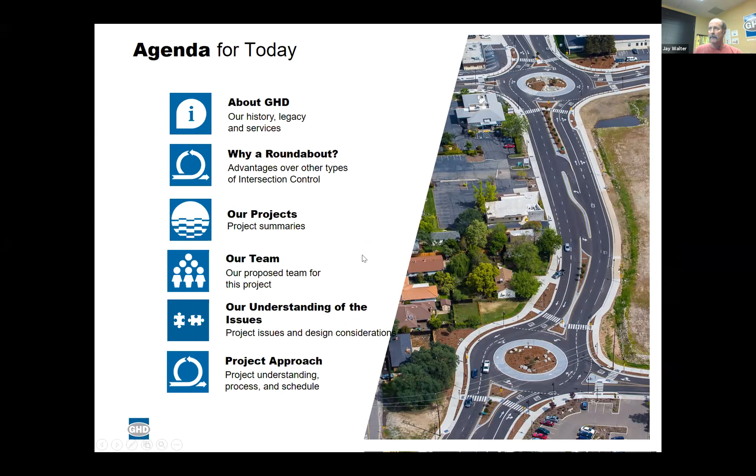GHD as a company is based on 5 continents. We have over 10,000 employees with 200 offices, so we have significant resources at our disposal and a lot of experience with roundabouts, especially in Australia and New Zealand, where they are quite common. We have folks from our Roseville office and San Luis Obispo office working on this project, so it's quite an important project for GHD.

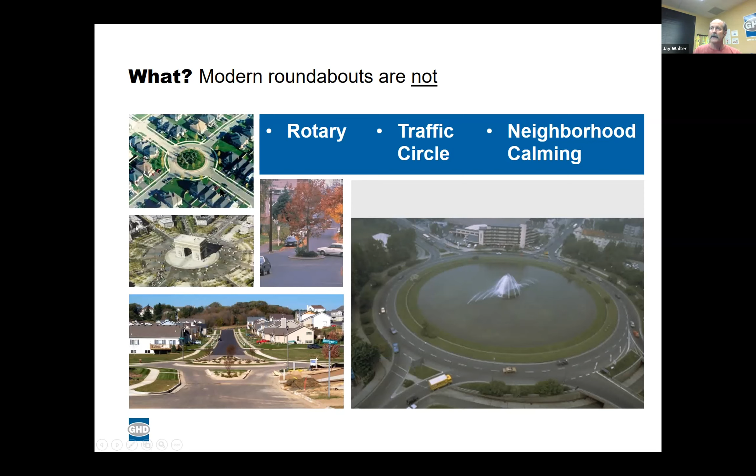Let's talk a little bit about roundabouts. Modern roundabouts are not a rotary, a traffic circle, or a neighborhood traffic circle. You can see some of those examples in the pictures on this slide. One of the main differences is that these circles have entry points that come in directly from the side streets, and that is not what we call a modern roundabout.

A modern roundabout is circular. It utilizes specific design criteria for the entry angles and for the size of the center island, and it's designed to control speed through an intersection. It also accommodates the multi-modes of transportation that we have, like pedestrians, bicycles, cars, and large trucks.

Typically it has a center island that can have some landscape or decoration. It's got a raised truck apron, which you can see in this light color around the middle, which allows some larger trucks to track through the roundabout and still stay on pavement. It has splitter islands at each entry point where traffic going in or coming out of the roundabout is separated. Very importantly, it has what's called a yield on entry as you approach and enter the roundabout.

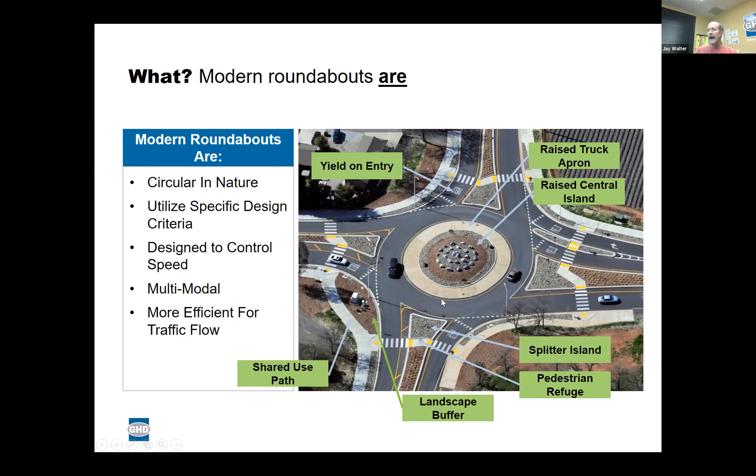So the idea is that you need to control your geometric speed on your approaches to the roundabout so that you can control and slow speeds through the roundabout and have traffic be able to enter and exit in a very safe manner.

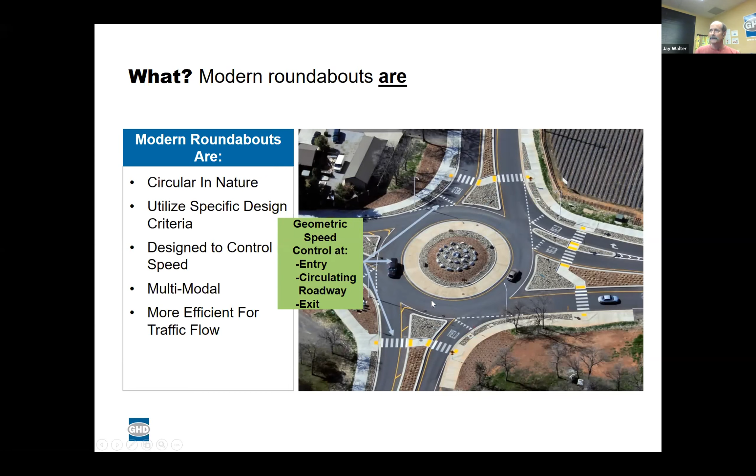One of the roundabouts that has been constructed is nearby. Many of you have probably driven or seen the Holman Highway 68 roundabout, constructed a couple of years ago. The feedback we've received from Monterey has been that it's performed in a very outstanding way. It also helped clear up some of the traffic confusion for the entrance to 17 Mile Drive. This is an example of a modern roundabout with the yield on entry.

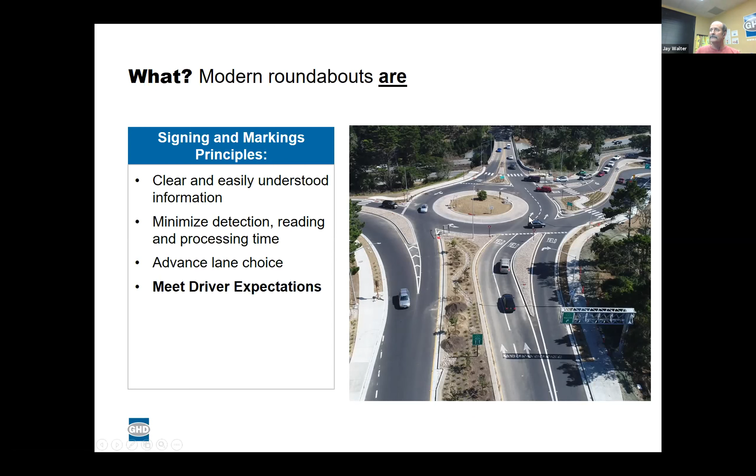It has clear markings for vehicles as they approach, so they can have a real good expectation of what they're going to do when they get there. They're warned ahead of time that a roundabout is coming, they see the lane markings where they need to be, and then they're told to yield at the entry point, and they pick a gap to go and enter the roundabout.

A modern roundabout also accommodates all users, from emergency vehicles, large trucks and trailers, pedestrians, cyclists, and especially pedestrians with disabilities who can't have curbs and other kinds of things blocking them as they're trying to cross an intersection.

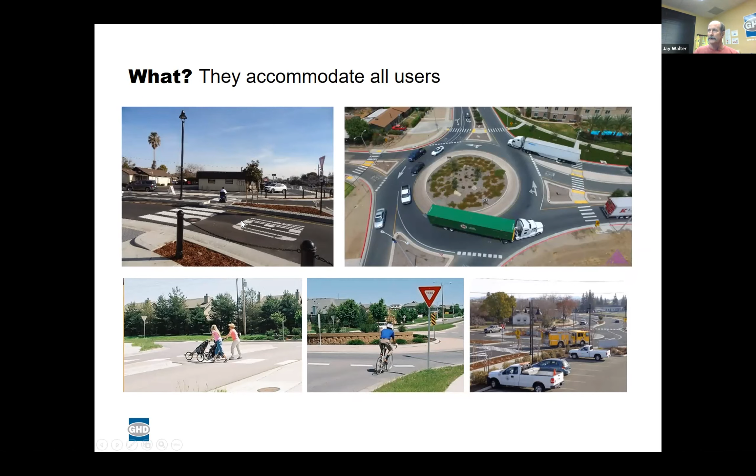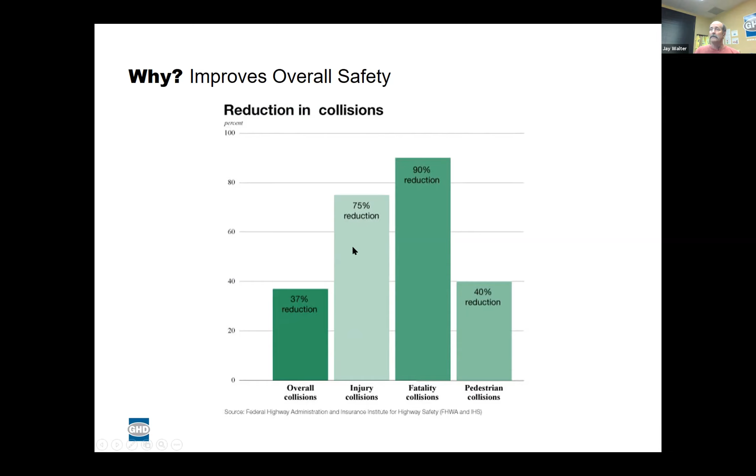Modern roundabouts improve overall safety at an intersection. As you can see from these numbers, overall collisions, injury collisions, fatality collisions, and pedestrian collisions have significant reductions with a roundabout compared to a signalized intersection.

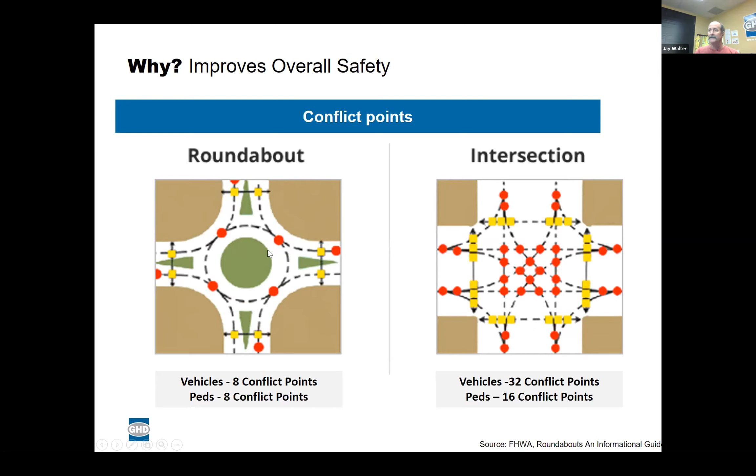So why does it improve safety? There's a couple of reasons, but one of the most important is that this intersection diagram shows vehicles entering and exiting have as many as 32 conflict points where they could collide with another vehicle. There's also 16 conflict points for pedestrians, increasing their exposure. But with a modern roundabout, conflict points for vehicles are reduced to only 8, and pedestrians also only 8. That's because you have fewer lanes entering and virtually no one crossing anyone else to make left turns, U-turns, or go straight through.

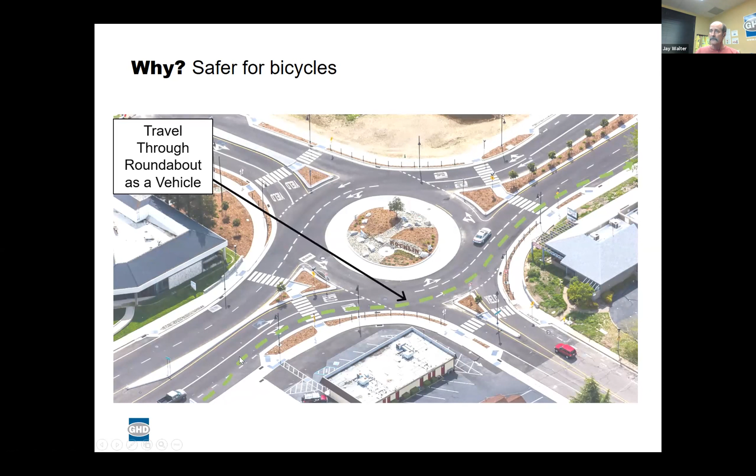Modern roundabouts also provide a safer way for bicyclists to get through an intersection. A bicyclist can travel through in a couple ways. The green dashed line shows when a bicycle wants to travel through like a vehicle - speeds are slower, and generally it's safer for a bicyclist to do that. But for a bicyclist that's not as confident, they can get off and use the shared use path for pedestrians to cross the roundabout and then go about their way on the far side, creating a slower speed in the intersection for cyclists as they cross.

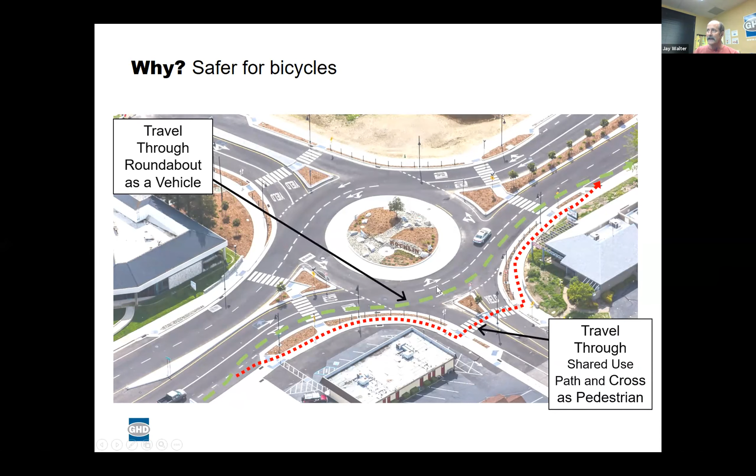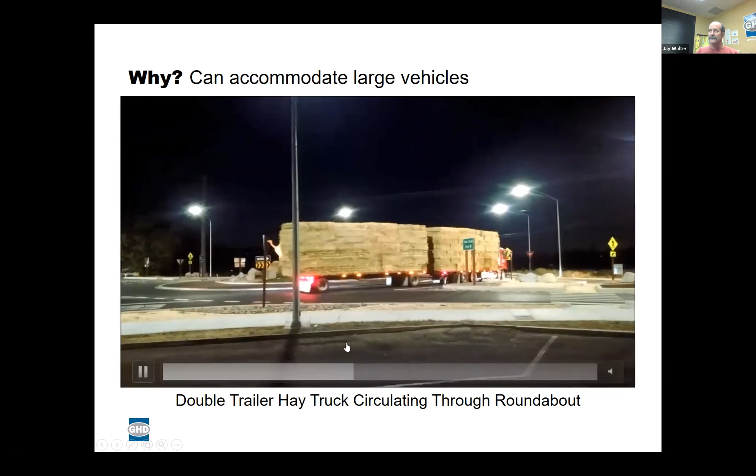A modern roundabout can accommodate large vehicles. You can see this double trailer hay truck coming through the roundabout, with intent to make a left turn across the intersection. He's circulating slowly but surely, with other vehicles following slowly behind, one waiting at the entry point to find the gap to get in. Then the hay truck moves off onto the far side of the roundabout where he has completed his left turn without having to wait for all the other traffic to stop crossing for him to go through.

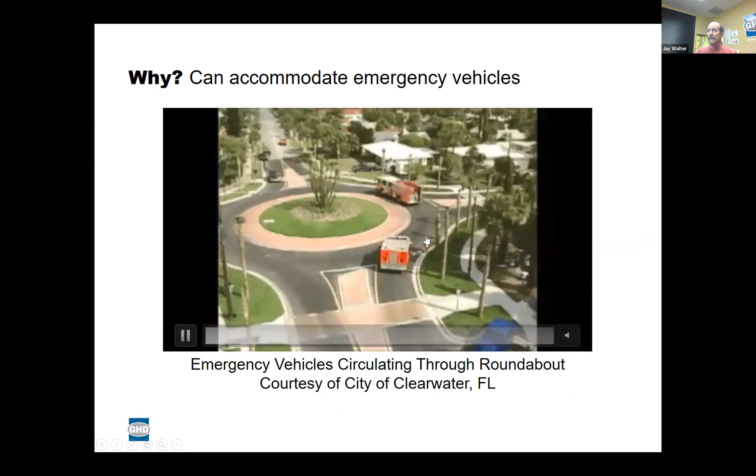For emergency vehicles, the roundabout is designed so those vehicles can circulate through at a relatively safe speed. They can't go screaming through at 40 miles an hour, but they can go through at 15 to 20 miles per hour, which provides safety as well as the ability to see more clearly vehicles that might already be in the intersection.

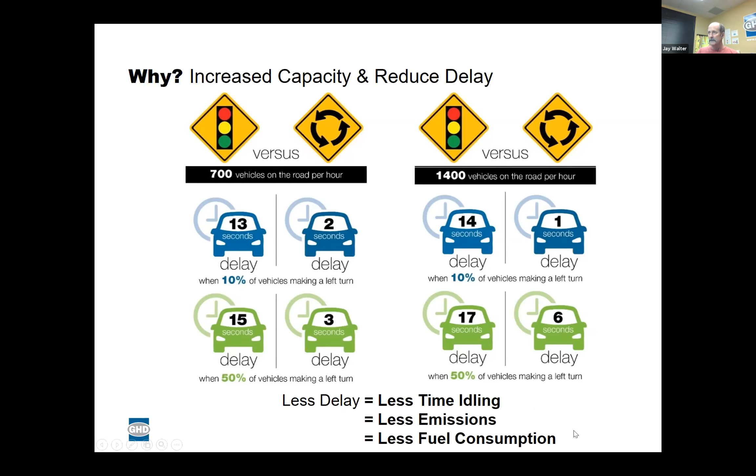But with the roundabout, entering with an appropriate gap and circulating through to make that left turn, your delay is much less. Reducing delay means vehicles spend less time idling, there'll be less emissions, and less fuel consumption overall. So it's a definite improvement over a signalized intersection.

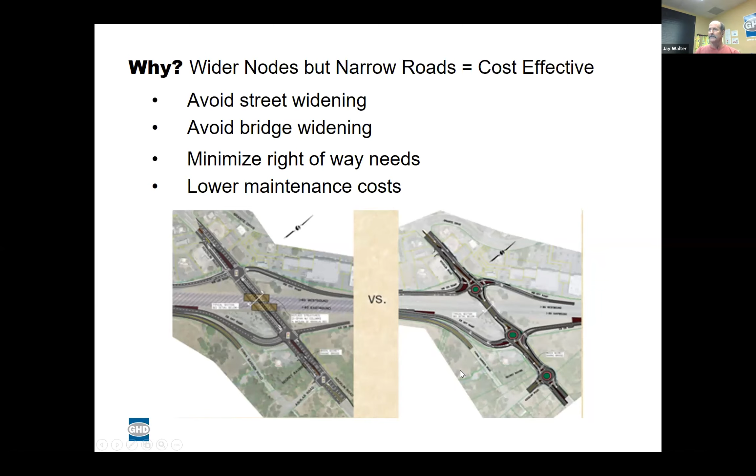At the scale of a freeway interchange, using this as an example, typically with traffic signals at the intersections of the ramps, you have many more lanes that have to be added to accommodate traffic flow and help them get through on the green cycles. But with the roundabout, you can simply have the roundabout instead of the intersection - you don't need as many lanes approaching. As a result, if you had a bridge structure, you may be able to leave it alone rather than widening it and creating a bigger structure, which means more maintenance cost along with all the other asphalt that's there. So there are some advantages to roundabouts from a cost and maintenance standpoint.

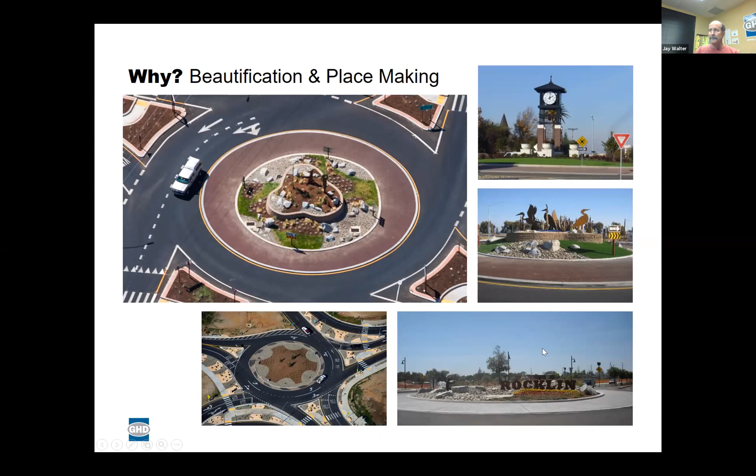Modern roundabouts can also help with placemaking and beautification. There's a few examples here - one on the lower left is a very simple approach to a center island landscape, and others are much more elaborate. This is something the community can participate in, deciding which way they want to go with a roundabout at this location and if there's going to be anything in that central island.

As it relates to GHD, we've completed 12 roundabouts constructed within California. We have another 12 to 15 that are in design right now in California. So we've really made a specialty out of roundabout design.

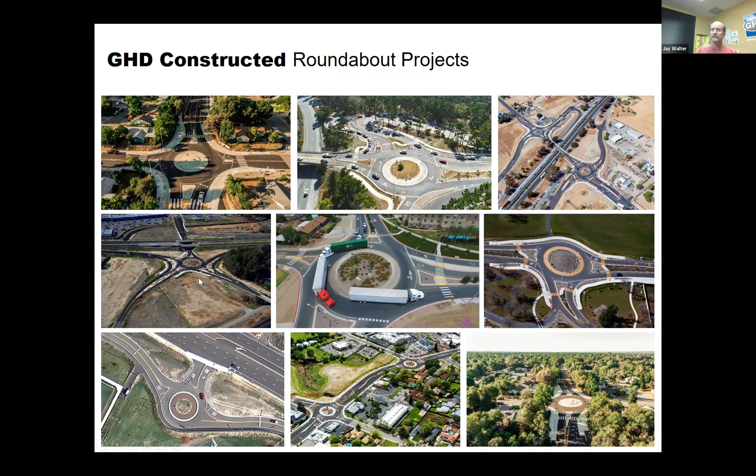We believe these have all been extremely successful. We have them in rural environments, in more urban environments on some city streets, close to freeways, and also as little side road access points to help with turns.

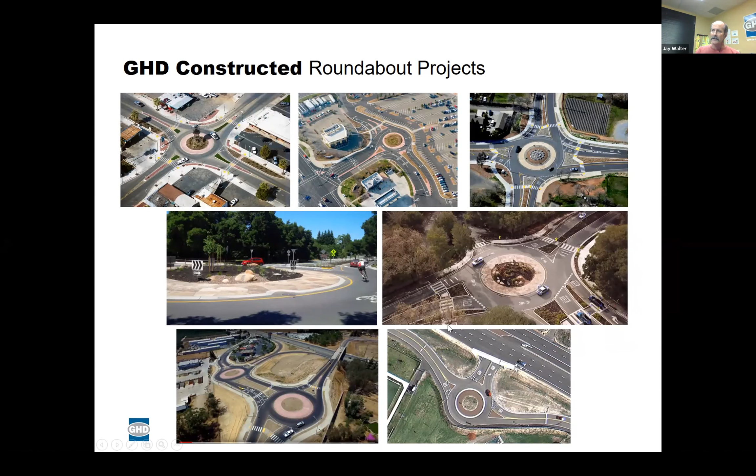So our good experience in roundabout design should be a comforting factor for folks who want the most efficient and effective roundabout design for the situation here at Carmel Valley Road and Laureles Grade. The team we've put together includes a couple of local firms, Rincon and Whitson Engineers, who have a big stake in projects and work done in this local area. We've worked together with them and with the county, so we believe we've got a really efficient team that's going to work towards the best solution for the roundabout at this location.

As Randy mentioned earlier, it was a pretty rigorous process for us to be selected, and we appreciated the opportunity to be interviewed before representatives from the Carmel Valley Road Advisory Committee.

As it relates to communication with project stakeholders, there are a number of agencies involved in this project's completion and execution. We are ready and able to communicate through community meetings, email, snail mail, or regular phone calls when there are questions or concerns about what may be happening or what progress we're making. We don't hesitate to make a point to have good communications with project stakeholders.

Our understanding at this location, as Randy indicated in the beginning, is that a number of studies have resulted in a recommendation for a roundabout at this intersection. So for us, the roundabout instead of the traffic signal has caused us to start working on the initial design, which we'll work towards getting the county's concept approval on so we can begin our design.

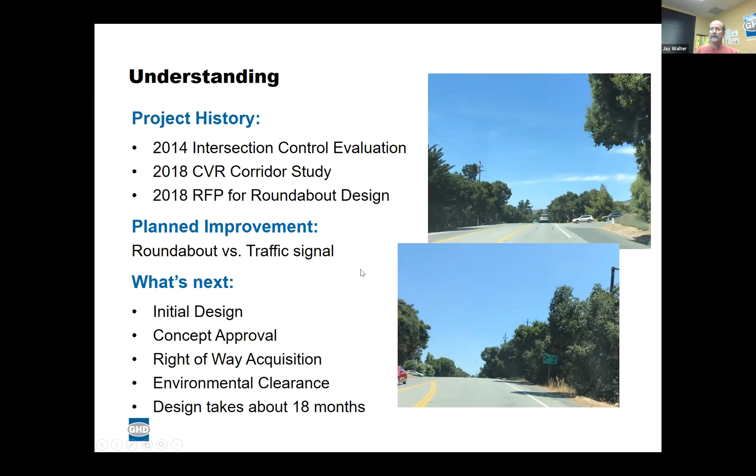There will be some right-of-way that's needed to be acquired, dependent upon the roundabout alternative that's selected, and there will be some environmental work that has to be done as the design progresses. We expect this design to take about 18 months to get finished.

So the issues as we see them, and we're open to more issues as they're identified, from a cost standpoint, we know there's a very limited source of funding available for projects along or in Carmel Valley. We know you're going to want a project that stretches those dollars as far as we can, so that's job number one for us: come up with an efficient design that doesn't gold plate or make something much more elaborate than it needs to be.

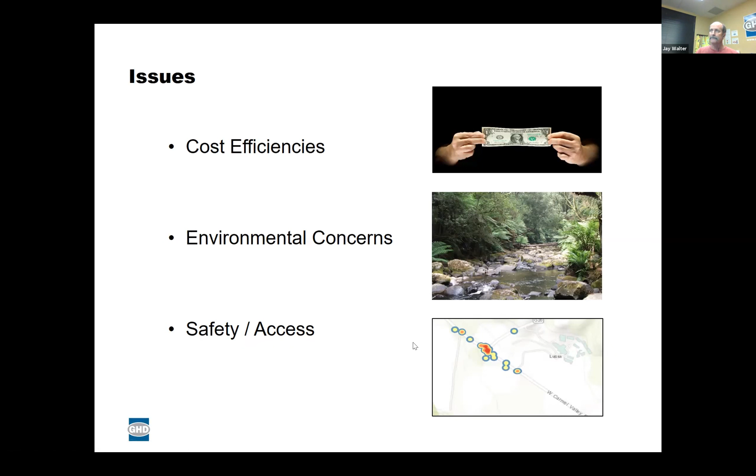We know there are some environmental concerns, especially with the creek nearby and trees and other visual values, and that will be handled with the environmental work that gets done. We know that from a safety and access point this is a problematic location, as Randy has mentioned. We're also aware that special events are a really big deal for Carmel Valley of all different kinds, attracting visitors and residents from nearby towns many times during the year, although with COVID maybe a little less, but bottom line, we know we're going to get past that.

The other factor is disruption during construction. We want a design that takes care of construction so the contractor can be efficient, but also so residents and folks going through the intersection can continue to get through with minimal disruption. And based on recent things that have happened, emergency evacuations are a big issue now, especially related to the river fire, when you need to evacuate a large population and don't have a lot of big wide roads to do it. We believe a roundabout can help with that too, and I'll talk about that in a minute.

From a safety standpoint, as Randy mentioned, this is the highest collision rate location along the corridor. As you can see from this red dot in the middle, that's the highest concentration of collisions. They're broadside and rear end collisions, generally related to two-way stop control with turning movements taking place when someone doesn't get the right gap and unfortunately gets hit by another vehicle.

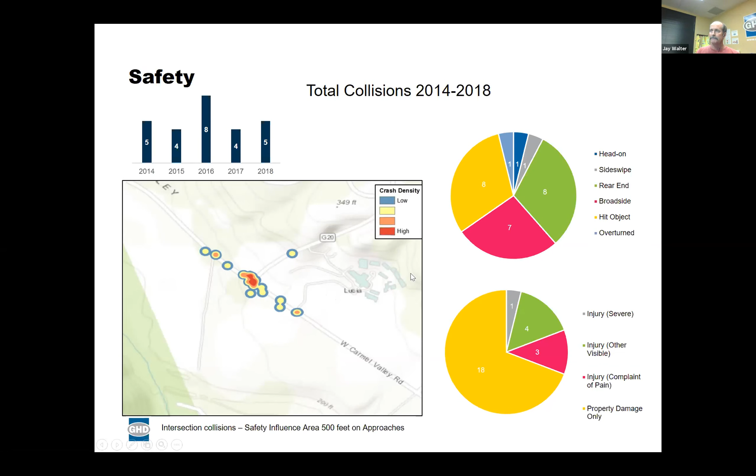We know there's a bus stop that's important at this location on both sides of the road that has to be accommodated. We know sight distance at the intersection is important because of grades on the approaches, and that Laureles Grade Road is a steep downgrade that has some folks concerned about out-of-control vehicles that could come down into the intersection. We believe the roundabout design will help with all of those things.

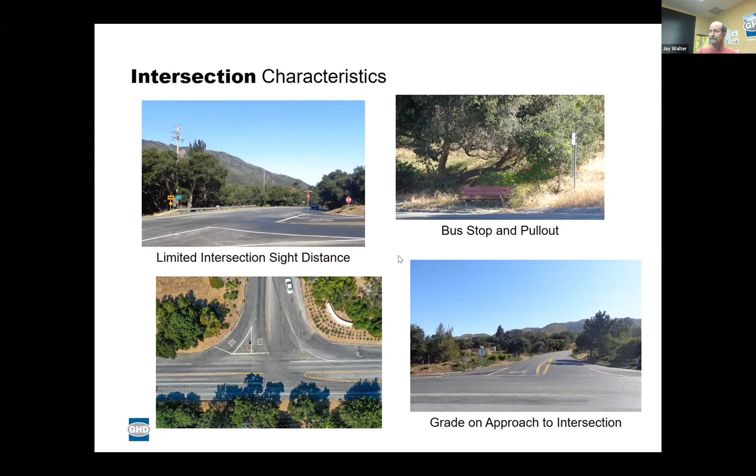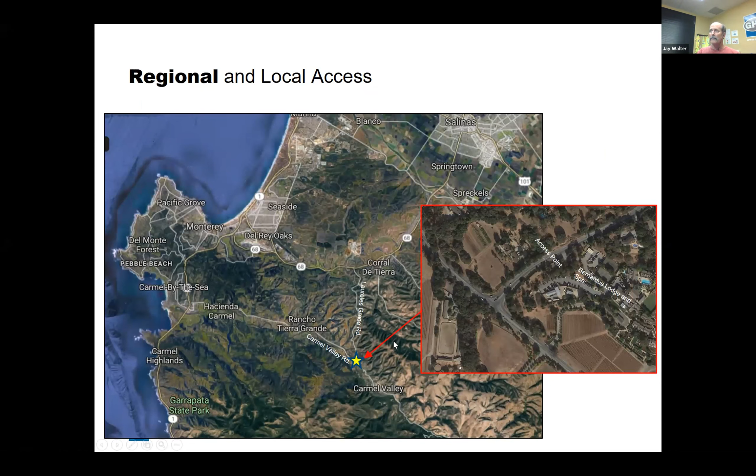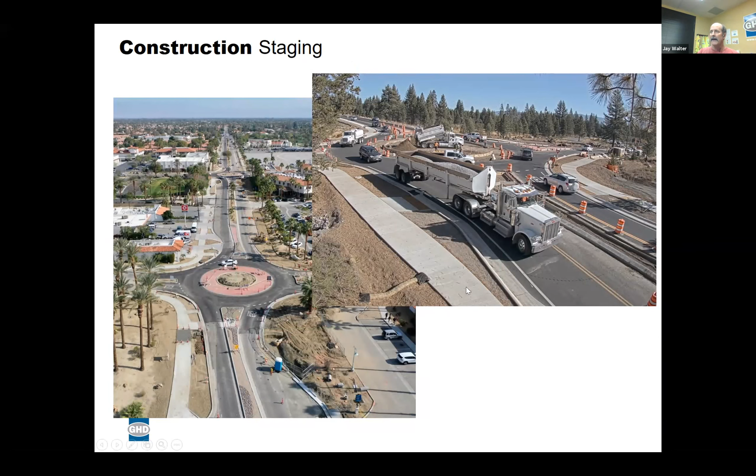And we're getting close now.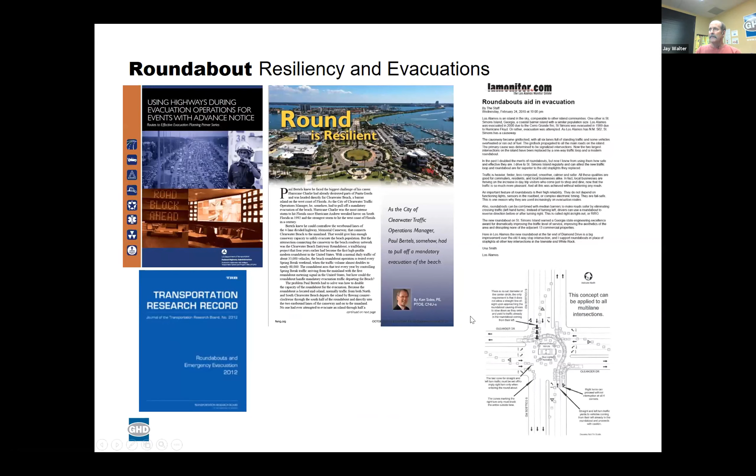This particular resiliency and evacuation slide, I wanted to share with you because this is a location in Clearwater Beach, Florida, where emergency evacuation operations use the roundabout as a way to split traffic that might be going in different directions, where at the end point there's no need for traffic cones and all kinds of signs to try to get people to follow. The roundabout itself has clearly defined paths that, once identified for flow in the opposite direction or the normal direction, can be used very effectively for helping in an evacuation situation.

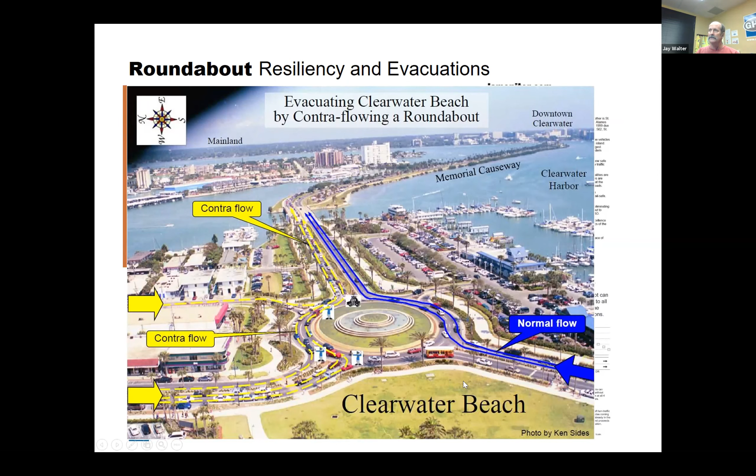And that's my presentation. So I'd be happy at this point to answer questions as they might be.

I don't know if I should go ahead and just stop sharing the screen. If at this point in time, I guess we could always bring it up again if we need to.

Great, thank you so much for the presentation, Jay. That was really comprehensive, and I love the picture of our little roundabout that we have up here at Highway 68 and Highway 1. It truly was a game changer. It just knocked out so many traffic issues that had been there for years. So we were all really pretty pleased with it.

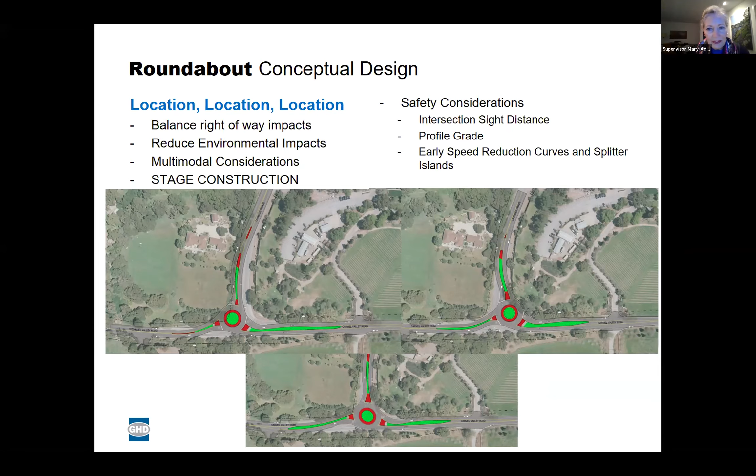Okay, and then I'll go, Ellen Osborne had a question, and the question is that currently traffic coming from the west is coming in at 50 miles an hour. About how far to the west would one need to start slowing the traffic?

We would recommend that there would be signs about a half a mile away from the roundabout intersection, and then a quarter mile away for where you're actually beginning to see the physical change, the approach to the roundabout. You'll start to see some changes. So that's about how far away from the intersection we'd be when a motorist would start seeing a roundabout sign coming up, and then a short distance later they'd see the change in how the approach to the intersection has been done.

Good, thanks. And then Randy, I think this is a question that you presented. It was a question from Michelle: what are the causes of most of the accidents, and what are the statistics around the accidents that have taken place at Carmel Valley Road and Laureles Grade?

I would certainly be happy to provide the statistics offline, and I can send them through Supervisor Adams' office. We use the state's system called SWITRS, an acronym for Statewide Integrated Traffic Records System. That's the repository the state maintains of all traffic collisions that a CHP officer has reported on and incorporated into the system. Jay's exhibit showed what we call a heat map in the traffic engineering industry, showing the concentration of collisions, with red being a higher intensity. But the actual causation comes out of these CHP reports, the traffic collision reports prepared by a CHP officer, kept inside the state repository, which we have access to. So we can provide you those statistics for this information.